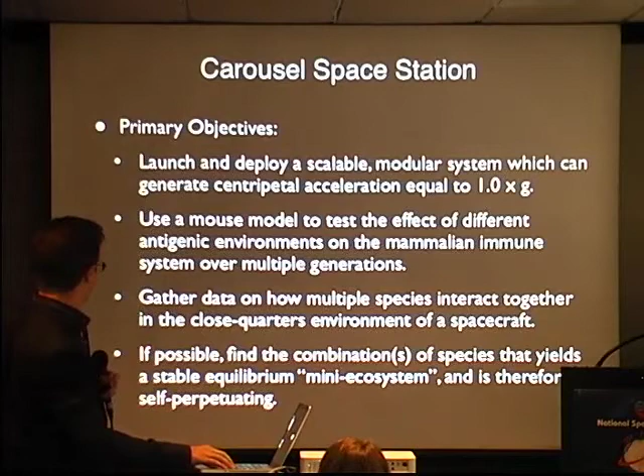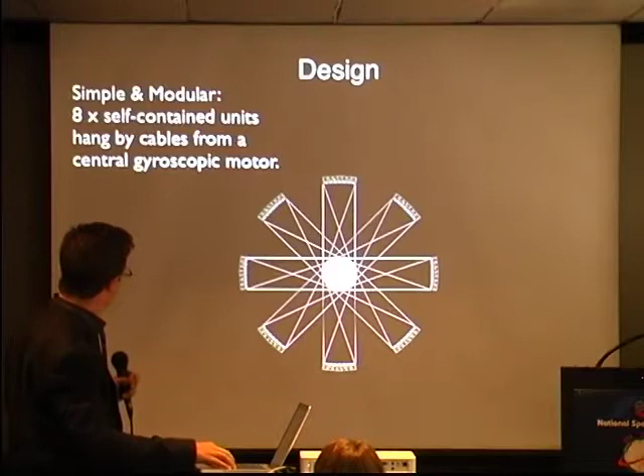From the module, so the design, I've kept it small and simple. 8 modules hang from cables from a central gyroscopic motor. Now these are essentially 9 moving parts, and they're going to be rotating as we would in a torus. I've kept it small, 20 meters across.

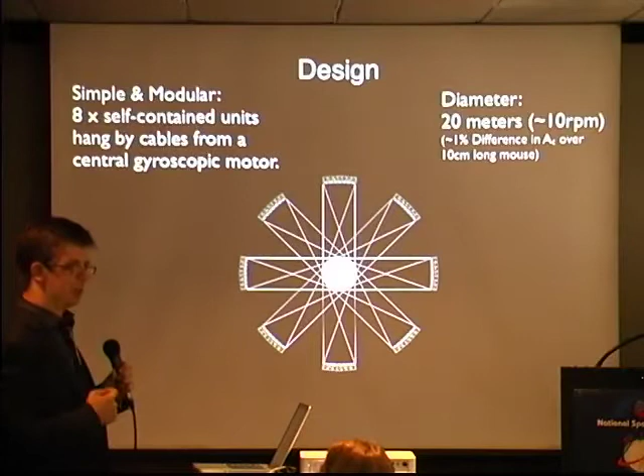This means that for a 10 centimeter long mouse, you've got that same 1% ratio between head and foot. 20 meters is something we can launch in spacecraft that are flying today.

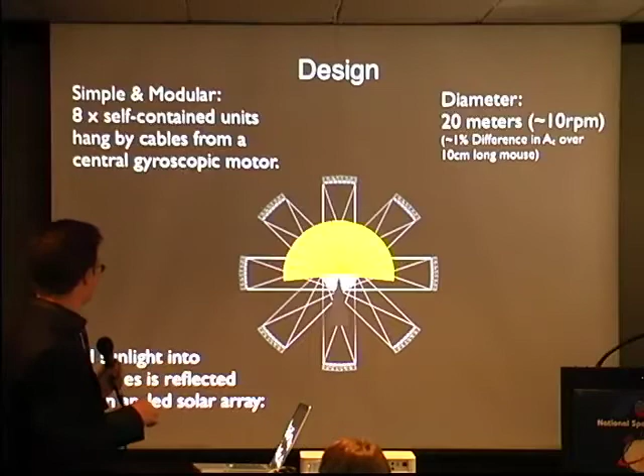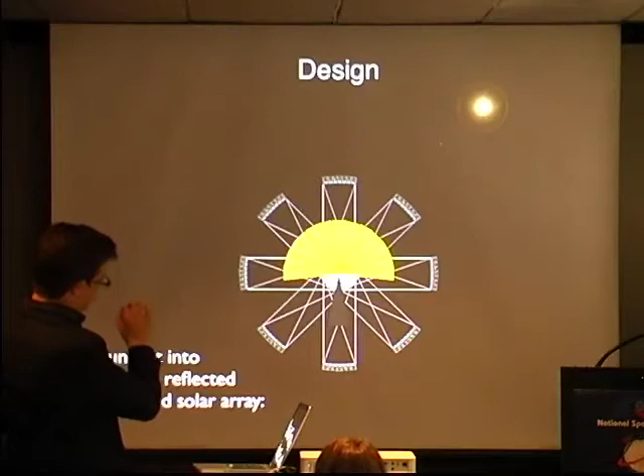How does it work? Well, I've thought that sunlight can be reflected through windows into each module. So to better visualize that, we've got the sun behind the spacecraft, sunlight shines through the cables, and each of the modules only has windows on this side, so they're not exposed to direct sunlight. What we can have is either reflectors or filters on the solar array, so that we can filter out some of the worst radiation and reflect it back into the individual modules.

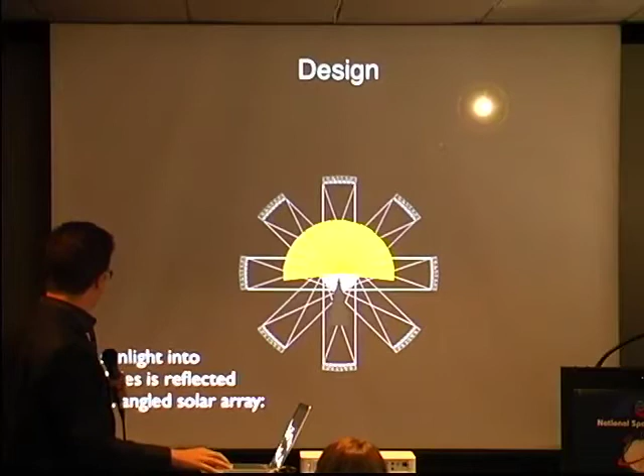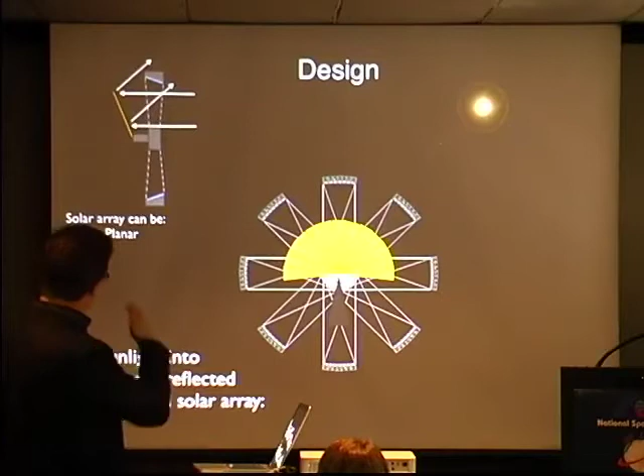Also, we want something that can not just stay at the distance from the sun that the Earth is. So having a solar array or a reflector array that can be planar or concave, so it can concentrate the light into the modules, or alternatively, as you get closer to the sun, be able to diffuse the light so that the plants and animals in the module receive the same amount of light as they would expect on Earth.

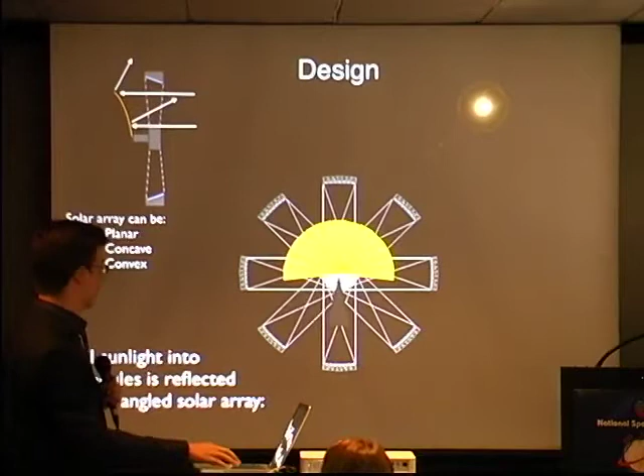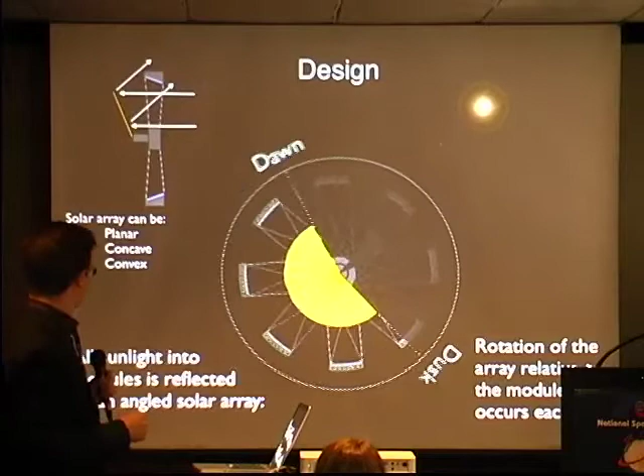Day-night cycle. Rather than using lights inside the module, since this is reflected light, I've suggested we have a solar fan array that rotates once every 24 hours relative to the rotation of the entire craft. As you can see, the dawn line is moving around slightly faster than the rotation of the craft itself, and that would mean that we can simulate a more natural day-night cycle inside the craft.

I've used Falcon 9 as a rocket model just because I could get the details for the payload bay. These are rockets that have already been launched, you probably saw the launches last year. The payload bay is only 4.6 meters across, so I've designed my craft around there, and I'll put the caveat out there, I'm not an engineer, but I believe this is a feasible way of packing modules into the payload bay.

You've got a central gyroscopic motor, 8 modules which are stacked on top of each other, so they can be launched in an upright position, so any of the plants and animals that are in there aren't being thrown around inside the craft. You have a solar fan array which is folded up on launch, and a folding truss structure which will be used to deploy the modules.

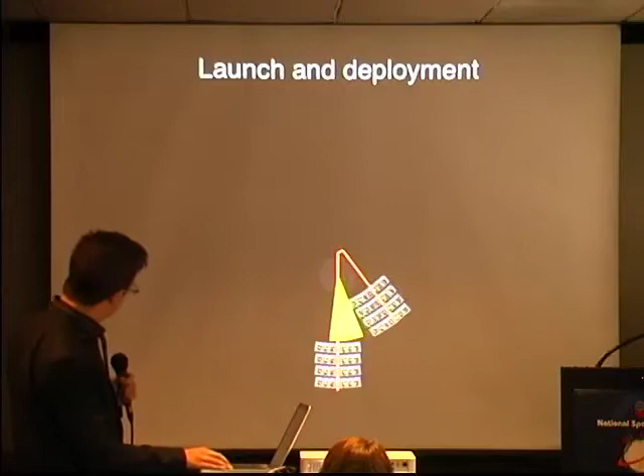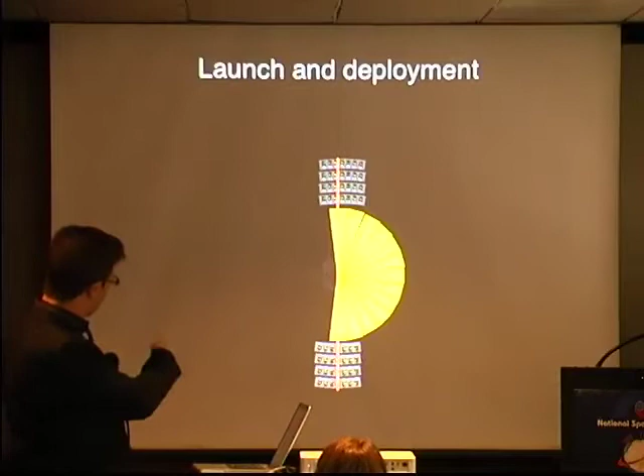So it's got an offset hinge. How this works is you've got this offset hinge, so as it deploys, half of the modules come out, the fan unfolds, and so this is the first action once it's in microgravity, you have a situation where the craft is balanced around the central gyroscopic motors.

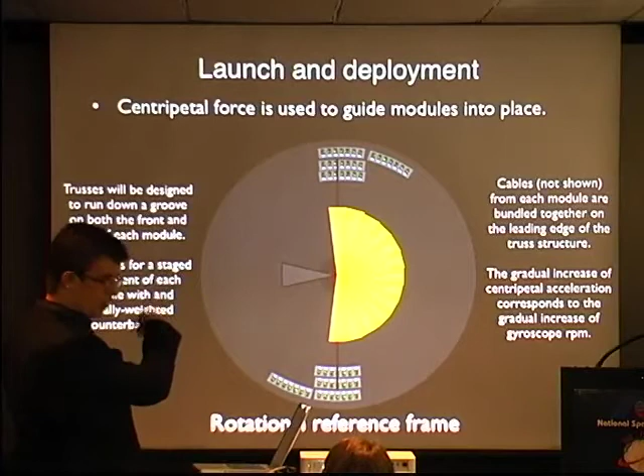I'm not going to pretend that it's rotating, but if we pretend that it's now rotating, the modules feel a centripetal force to the outside, and if we have this truss that runs down alongside the modules, we can, like dealing cards from the bottom of a pack, individually deploy the modules, and they're counterbalanced, so the cables, which I haven't shown here, have to be bundled up, and that's something which would need to be designed carefully.

But as the modules deploy, we can do this staged deployment, so eventually they find their place around and equally weighted around the central module. And as this can be done as the module is gradually speeding up, we have gyroscopes in the current space station which maintain attitude, and these, by Newton's law, would gradually speed up and achieve 1g of acceleration.

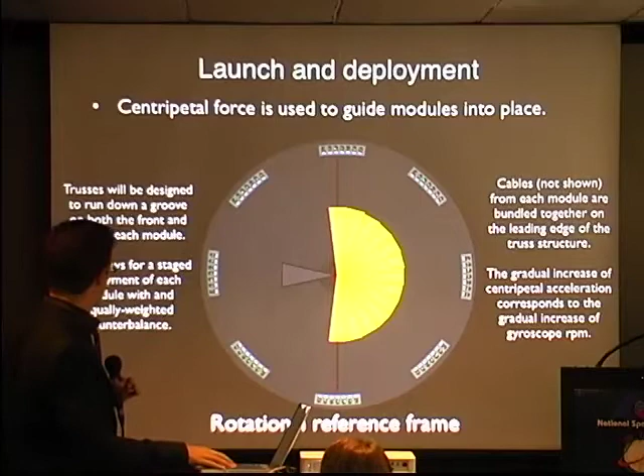So possible issues with design: heat management. As I understand it, the biggest problem with the space station as it is currently is not keeping it warm enough, but actually keeping it cold, because it's bathed in straight sunlight. So is it possible - and I was speaking with Jim Shear, who is, I'll apologise for forgetting his title, but he's a missions organiser at NASA - was saying, yes, it is possible to have a passive module which has gases which surround the module, and as it receives sunlight on one side of the module, it radiates it on the other, so the entire module can stay at a stable temperature.

Obviously, I've designed this so it's not a solid torus. It's modules hanging out from a central motor, so there are various systems for deploying cables without them getting tangled up. Will we have resonance effects of the modules bouncing around? That might be a problem, but that would be something further to look at in the further design.

And also, you've got these long cables which are being exposed to solar radiation. There's a possible magnetic flux that can be induced across the cables, so maybe we need to use different materials. And lastly, of course, if you use a solar panel which is not perpendicular to the sun, maybe you lose solar energy. Maybe there needs to be a different design of solar panels in that system.

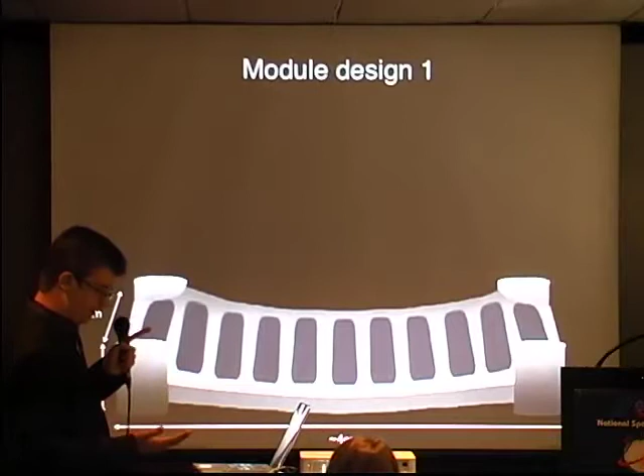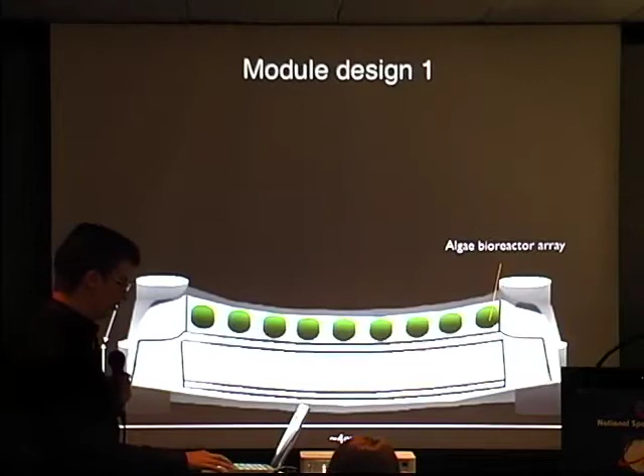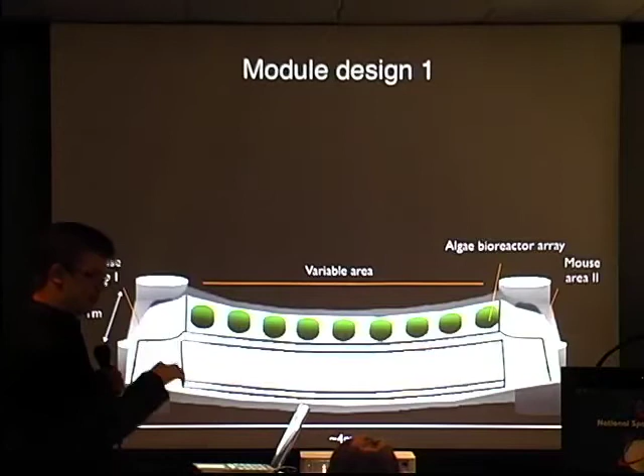I've said do 4 duplicate designs, 4 counterweighted designs, so 4 designs of modules done in duplicate. These are just my ideas, but they'd have to be further researched. Have an algae bioreactor array which recycles and filters most of the air going through the system. Have mice planted in each end of the capsule, perhaps female mice in one end and male mice in the other, so they don't find each other until later once the system has been deployed. Then have a variable area in the middle which is modular, so we can change the environment from module to module. And you've got 4 supplementary pillars around there where you'd put electrics and other things.

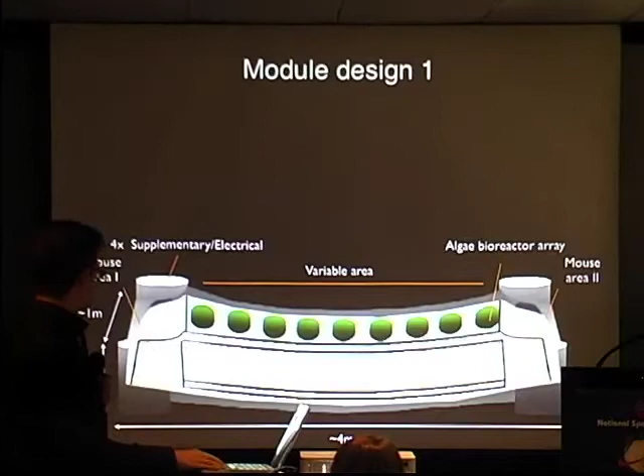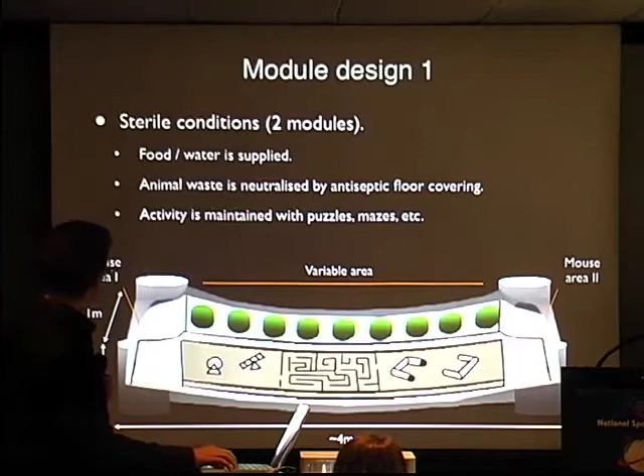For the first one, you want to test whether these mice get sick after extended exposure to sterile conditions. So you have food and water supplied, have animal waste neutralized by an antiseptic floor covering, keep it as sterile as possible, but maintain the activity of the mice with mazes and puzzles.

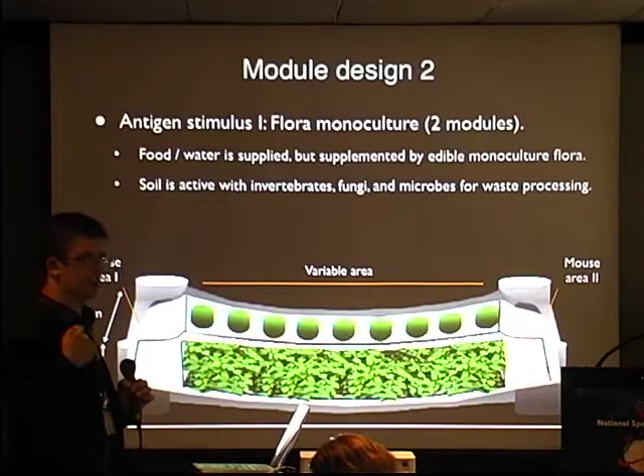Have a second configuration where you've got a diverse set of plants. Have either flowering plants or other things which produce pollen, which is another class of antigens that produce different kinds of immune effects.

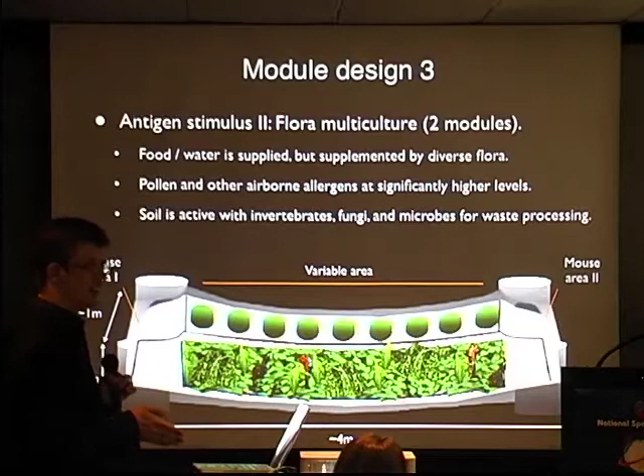Do these kinds of immune responses generated in the mice - is this necessary in a space environment? And of course you've got the same bugs, fungi and microbes in the soil for waste processing.

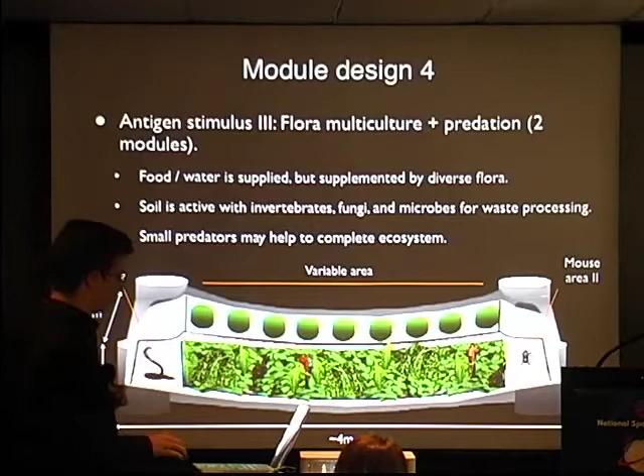And lastly, have some kind of predation in there which produces a different kind of response - the mice will be scared or exhibit other different behavioral characteristics once they're in a situation where they have predators. Is that necessary for the completion of a complete ecosystem?

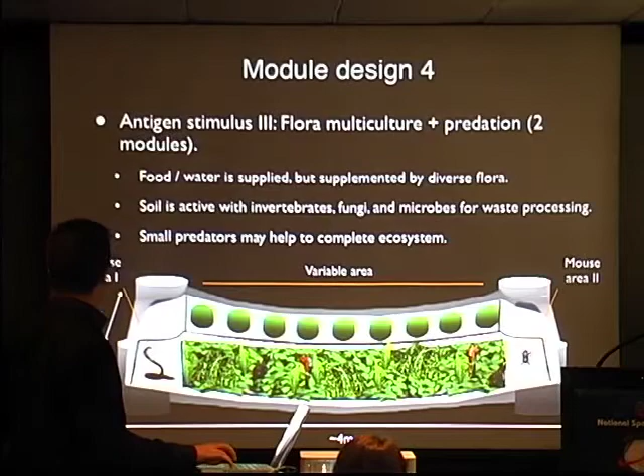So how do we measure the outcome of this? Obviously we can see the entire module deployed, but how do we measure it? Well, we have a pad. Firstly, we can measure the weight of the mice - we can require the mice to stand on a simple measurement pad before food is allocated.

We train the first generation mice - if they know that's where food comes from, then it keeps coming. We can monitor through video feeds the litter sizes and survival rates as the colonies progress, at a certain point into the deployment of the module.

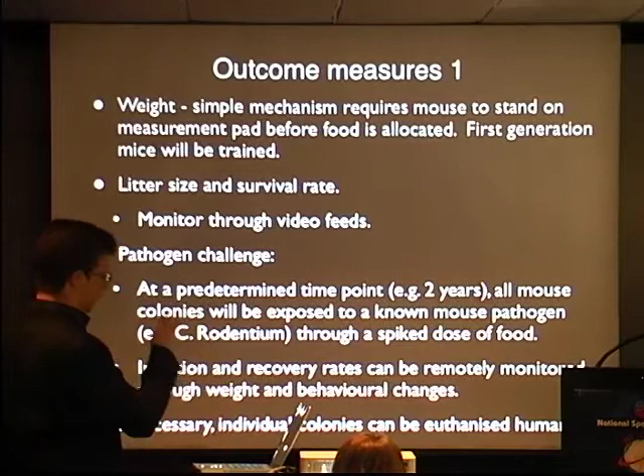So maybe 2 years after a number of generations of mice have gone by, we can expose the mice to a known pathogen. C. rodentium is basically gastro for mice, but there's mouse flu or any number of other mouse pathogens which could be a good test - ones that wouldn't kill the mice, just let us get a measure of how healthy they are. And if a problem occurs, we can euthanize them.

As a second mouse measure, we can make a GM mouse which will give us GFP - a dye from a jellyfish - which we can put into mice, and use to measure internally how healthy they are. Are their T cell counts up? Are they inflammatory? Do they have inflammation? We can have a green fluorescent protein that reports their levels of interferon and T cell activity, and by putting a UV light on them, we can measure that quantitatively by looking at the color.

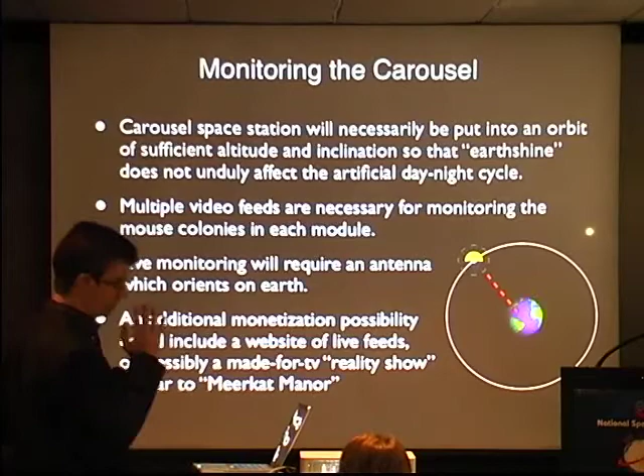So lastly, getting towards the end, we put the Carousel Space Station in a polar orbit so that Earthshine won't affect the day-night cycle. We need multiple video feeds, so we'll want a third rotational axis on the module so it can communicate constantly with Earth, and we can monetize it if we want by producing some kind of reality TV show if there's a market for that.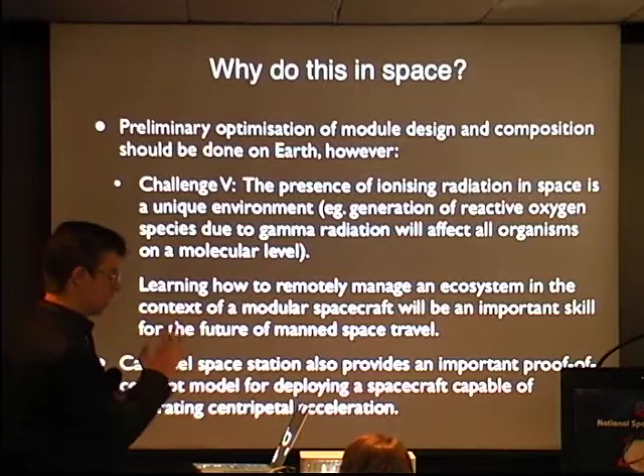Why do this in space? Optimization of the design can be done on Earth, but there is this fifth challenge - the radiation environment of space. So we're only going to get real results for this if we do it in space. Also, we'll learn how to remotely manage an ecosystem in the context of a modular spacecraft, and it will provide a proof of concept that we can deploy a spacecraft that uses centripetal acceleration to generate gravity.

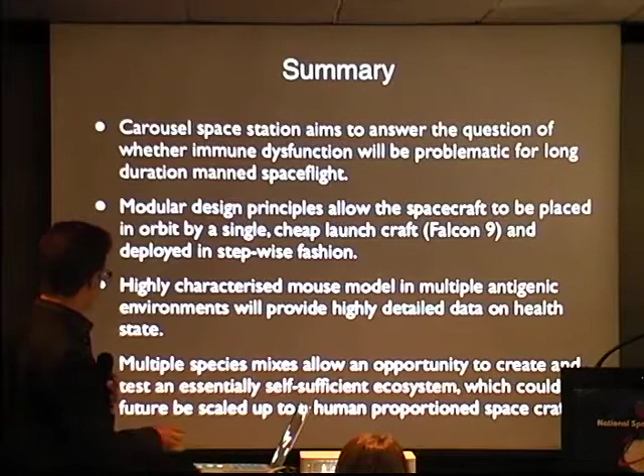So just to sum up, we want to answer the question of whether immune dysfunction will be problematic for long-term spaceflight. We have a modular design which allows us to deploy it by a single spacecraft that we can use now. We've got a mouse model which we know a lot about, and we can get detailed data on how healthy they are. And the multiple species mixes will basically let us test if we can find a self-sufficient environment. Thank you very much.